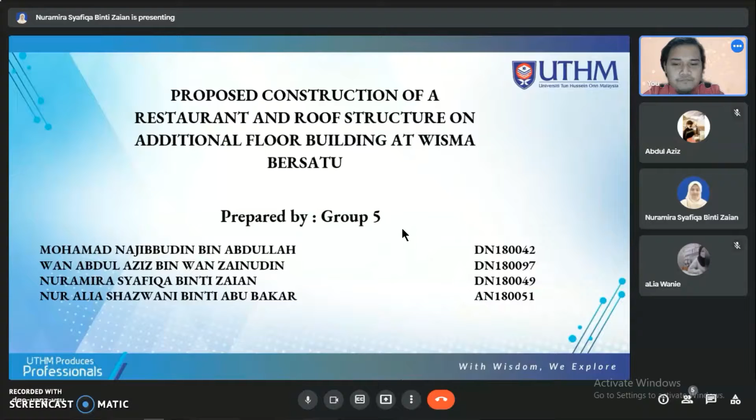Project title: proposed construction of a restaurant and roof structure on an additional floor building at Wisma Bersatu. Wisma Bersatu is a commercial building located at Pagoh, Johor. The employees at Wisma Bersatu exceed 100 employees from various fields and over 10 companies.

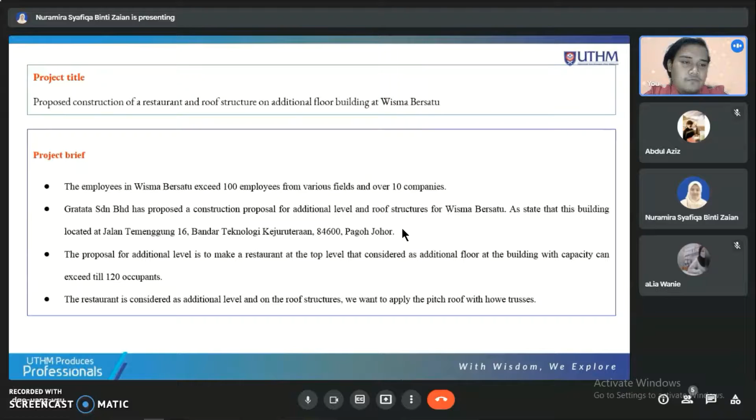Our company, Gratata Sdn Bhd, has proposed a construction proposal for additional level and roof structures for Wisma Bersatu. The building is located at Jalan Temenggung 16, Bandar Teknologi Kejuruteraan, 84600 Pagoh, Johor. The proposal for the additional level is to make a restaurant at the top level, considered as an additional floor of the building with capacity that can exceed 120 occupants at one time. The restaurant is considered an additional level, and on the roof structure we want to apply a pitch roof with Howe trusses.

The purpose of the project is to illustrate the design for the restaurant with roof structure at additional floor level by using Autodesk Revit, and then to create and learn the flow of the construction and apply it using Microsoft Project. We also aim to build a comfortable restaurant and resting place for workers, especially during break, producing a suitable structure for the restaurant at additional floor level based on the concept for commercial building design, and to learn and understand the method of planning a construction from the beginning of work.

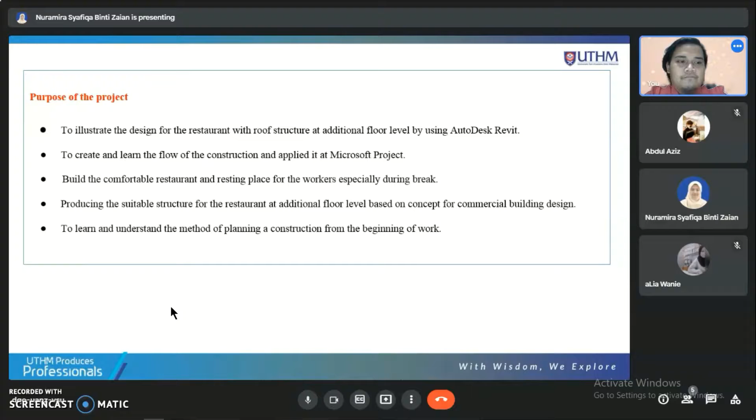For the additional level of the commercial building, a restaurant will be constructed. For the top area, we have three concepts: open eating area, closed eating area, and open balcony area. The open eating area and open balcony area are beneficial because they provide free fresh air and there is less need for light. This is because rooftop restaurants are often situated on high floor levels, which receive natural wind, making it unique.

The third rooftop area concept is the closed eating area. With the presence of a closed eating area, unpredictable weather condition factors can be resolved. This area needs air conditioning and lighting because there is no natural light and ventilation. Lastly, a curtain wall will be installed along the rooftop for safety requirements to prevent any accident. A curtain wall must meet system requirements to be effective in preventing a fall.

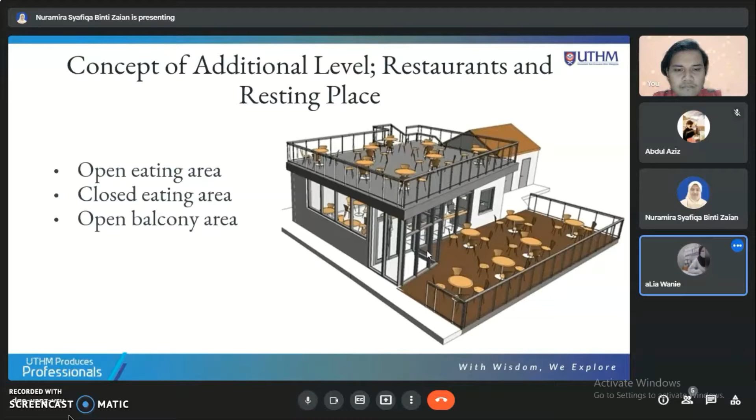The key elements that have been applied in the planning and design process are: first, green building; next, site location, curtain wall, and bathroom and washroom. For green building, it is actually simple, which is to reduce the overall impact of the environment and infrastructure on human health and the natural environment.

There are two types of green buildings. Since the beginning of construction, it is indeed equipped with green features. Then, old buildings are renovated to include new green elements.

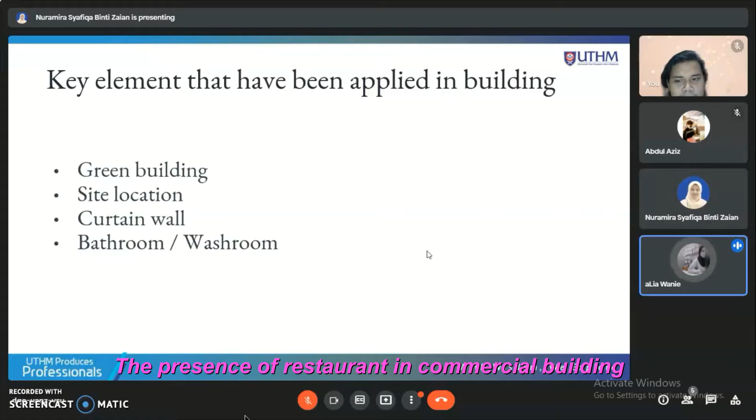For site location, by having a restaurant on the additional level of the commercial building, company staff and workers who are working in the commercial building, especially until late, have the option to purchase food from the restaurant. Therefore, company staff or workers who work late for irregular hours can enjoy healthy and affordable meals even after office hours. The presence of a restaurant in the commercial building can also help promote cost savings in terms of transport.

For curtain wall, the major function of a curtain wall system is to shield the interior of the building from natural phenomena such as sun exposure, temperature variation, earthquake, rain and wind. This security is divided into two key categories: structure safety and internal environment control. Failure of wall component, wall facing material and fastener are examples of such safety issues.

Bathroom and washroom. A bathroom, often known as a washroom, is a room in a house or other residential building that contains either a bathtub or a shower. The inclusion of a wash basin is common. In some regions of the world, the toilet is usually incorporated in the bathroom.

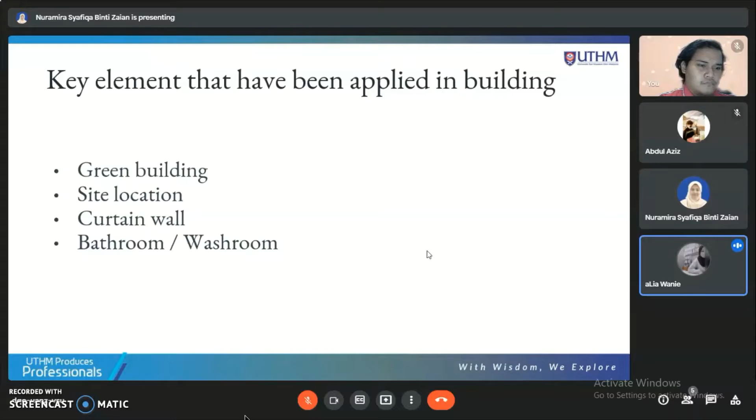I will present analysis of our truss. First, the concept of roof trusses is based on curve design. Basically, these trusses require less framework.

Next, curved roofs mainly reduce the emission of harmful CO2 gases. The construction of this roof is a simple technique, much similar to a standard flat roof, and moreover it is wind resistant. These qualities make it a low maintenance roof.

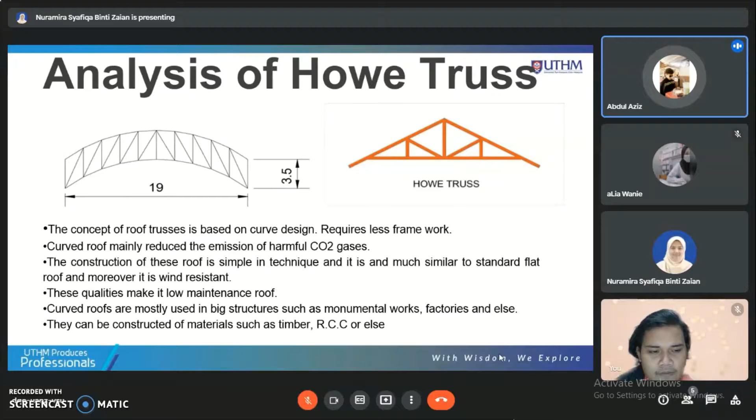Curved roofs are mostly used in big structures such as monumental works, factories and others. They can be constructed of materials such as timber, R.C.C. or steel.

Next, structure analysis. Basically, there are a total of 41 pins from the structure. The structure is technically stable as the pins withstand the compression and tension to the span.

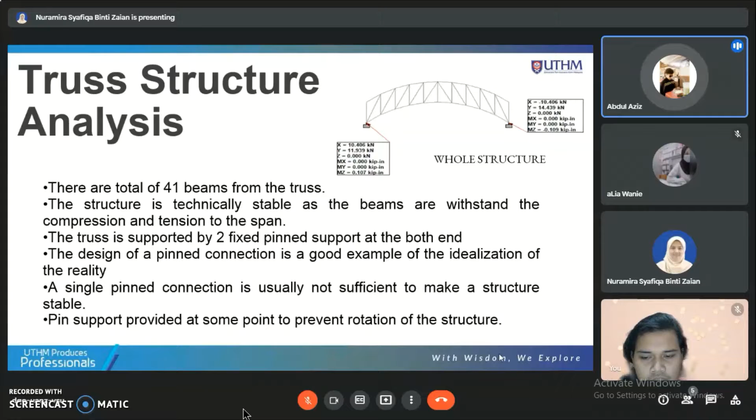The truss is supported by two pin supports at the both end. The design of a pin connection is a good example of the idealization of reality. A single pin connection is usually not sufficient to make a structure stable, and pin support is provided at some point to prevent rotation of the structure.

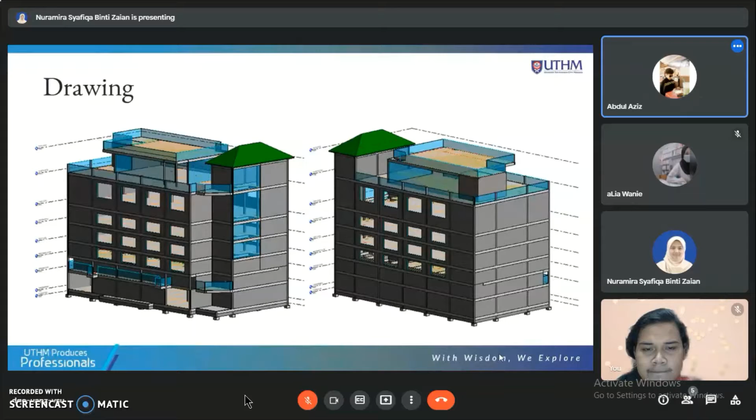Next is our drawing of the commercial building, Wisma Bersatu. Our building has 5 levels, and at the top of the building we have a restaurant and restroom, and we have our truss, and we also have a curtain wall.

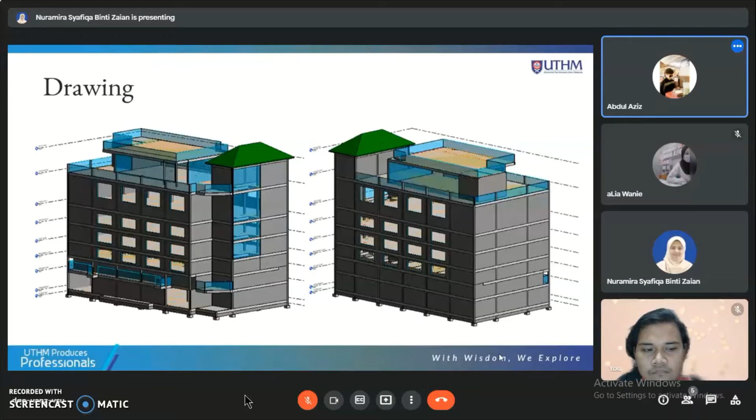For project scheduling, our project title, as Najib said, is the proposed construction of a restaurant and roof structure on an additional floor of the building at Wisma Bersatu. The project started 1st March 2021 and finishes 18th December 2023, a duration of 2 years and 3 months. Project contract sum is 2,555,516 ringgit Malaysia.

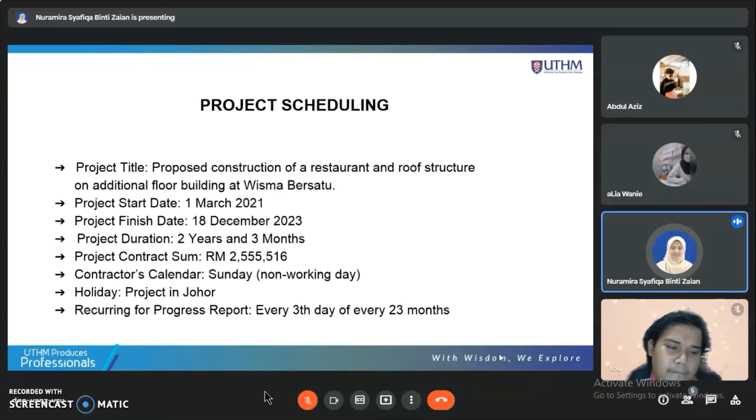Okay, let's see our Microsoft Project. Entry: it is the cadangan pembinaan penambahan struktur bangunan restoran dan bangunan komersial, Jalan Temenggung 16, Bandar Teknologi Kejuruteraan, 84600 Pagoh, Johor.

We start with kerja awalan, then clearing and setting out, and then we have progress reports, 23 progress reports, and then piling works, physical construction works such as work below the lowest floor finishes, structure works, substructure works like basement and sub-basement, and then ground level, then mezzanine level.

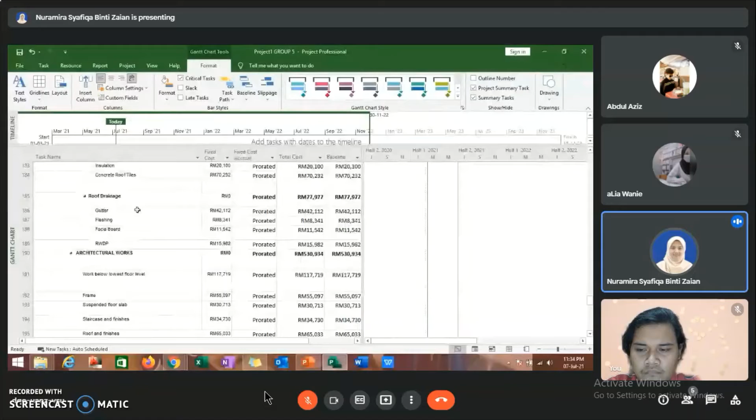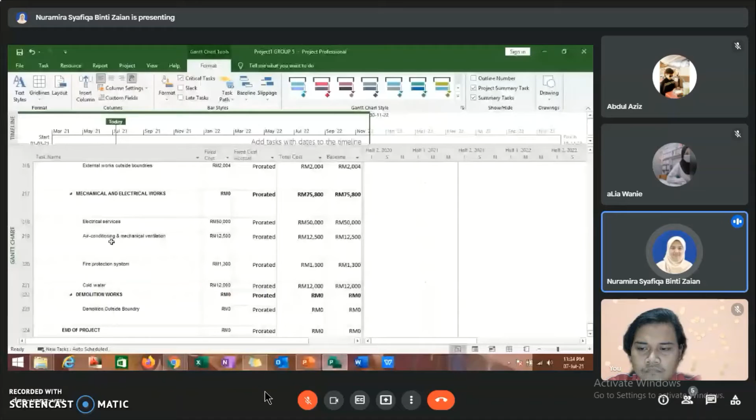After mezzanine we have first level, second level, third level, fourth level, fifth level, and our addition is the roof. At the roof we have the portal frame and roof covering like concrete roof tile, roof top level, and roof drainage. Then we have architectural works, infrastructure works, mechanical and electrical works, and lastly but not least demolition works, and end of the project.

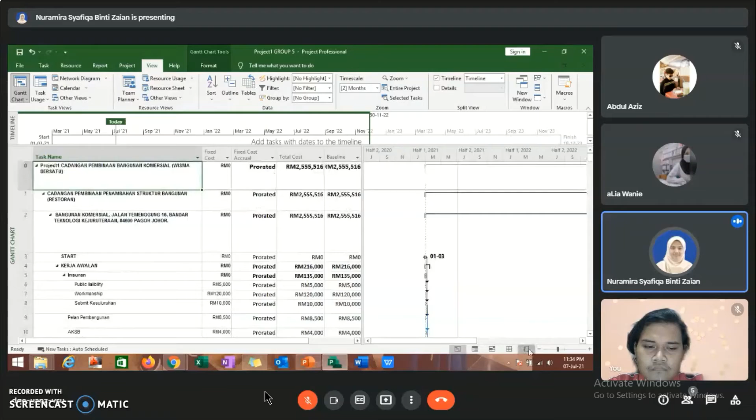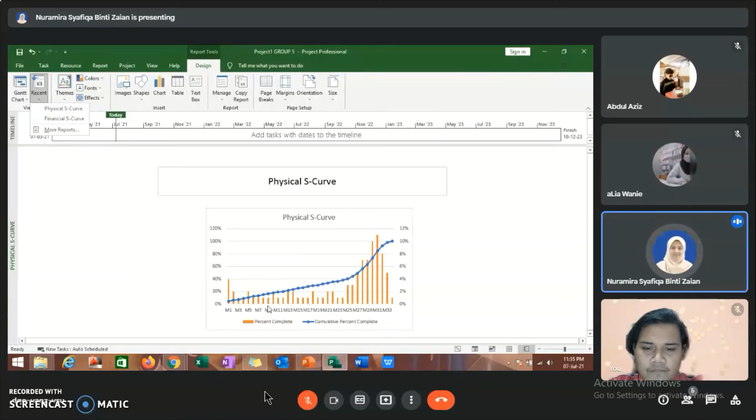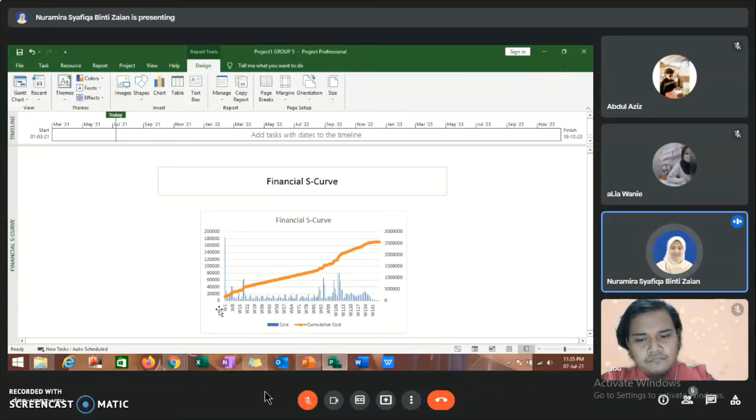For the conclusion, the reason the restaurant and resting place concept was chosen was to provide convenience and comfort for the occupants of the building along with the latest commercial design. This restaurant and resting place serves all of the occupants in the community. Moreover, it was built to show a well-designed and planned building with the design following the latest infrastructure. Also, the restaurant and resting place take into consideration the safety of all occupants, with the safety design following the regulations and standards as it should be.

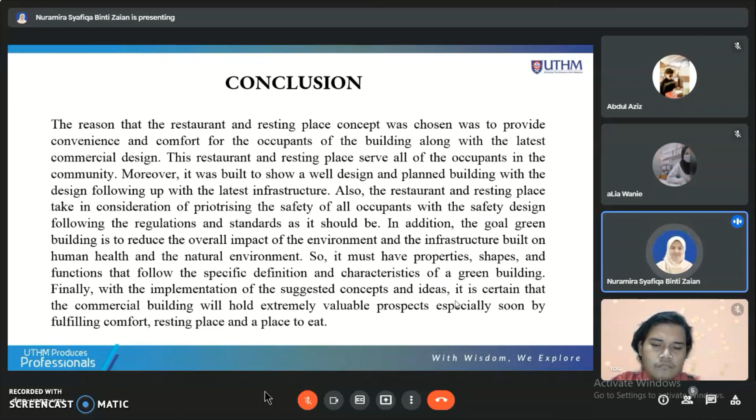In addition, the goal of green building is to reduce the overall impact on the environment and infrastructure built on human health and the natural environment. So it must have properties, shapes, and functions that follow the specific definition and characteristics of a green building. Finally, with implementation of the suggested concepts and ideas, it is certain that the commercial building will hold extremely valuable prospects, especially by fulfilling comfort, a resting place, and a place to eat. Thank you.